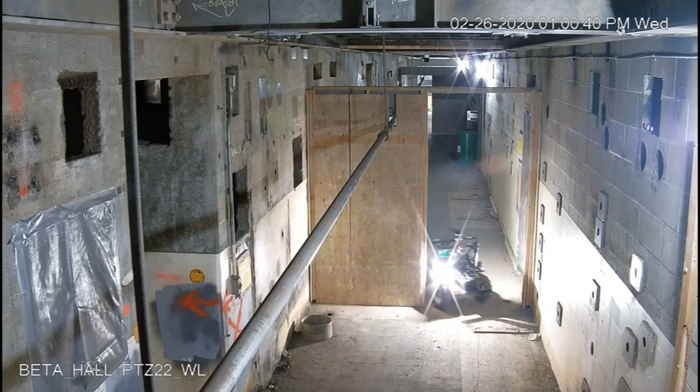In this work, we address the problem of enabling accurate and robust lidar odometry for autonomous robotic platforms involved in exploration of extreme environments, such as those found in mining, search and rescue, and planetary exploration missions.

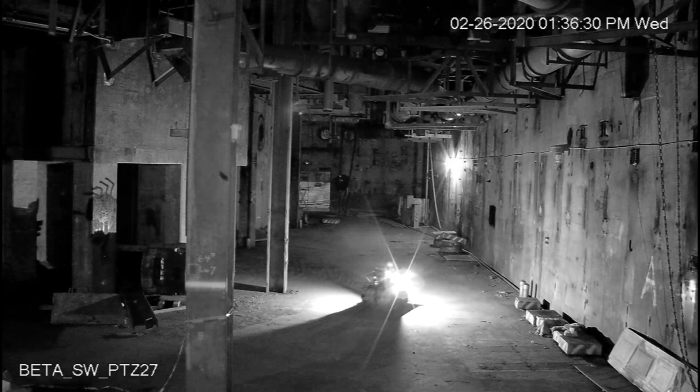In these scenarios, such as what you see here, onboard sensing faces severe perceptual degradation from conditions such as obscurance, self-similar areas, jerky sensor motion when moving over rough terrain, and even loss of individual sensor modalities.

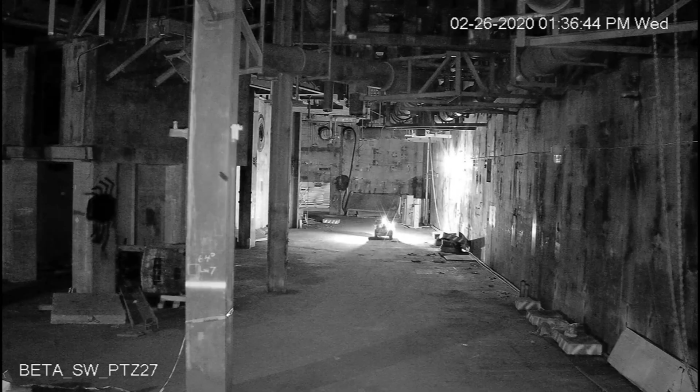This makes robust multi-sensor fusion a vital step towards achieving accurate operation in these perceptually degraded settings. While there have been many multi-sensor algorithms proposed that can achieve great accuracy, what we focus on here is the performance and the robustness under perceptual degradation.

To address these challenges, we present LOCUS, Lidar Odometry for Consistent Operations in Uncertain Settings. This is a multi-sensor, Lidar-Centric solution to real-time SLAM.

We will show here how it can achieve top-class localization accuracy in perceptually degraded settings and is robust to sensor failures.

LOCUS has been deployed on heterogeneous robotic systems in the DARPA Subterranean Challenge, where it was able to be part of Team CoStar's solution that won the urban circuit.

The proposed system can take a generic number of LiDARs and puts these through motion distortion correction steps. These are then fed into a point cloud merger to have one point cloud, which is then filtered to remove outliers and reduce the size of the LiDAR data to manage computational load. This then goes into our scan matching unit to do the LiDAR alignment.

However, one of the key components of this is our injection of external sensor modalities, such as visual odometry, wheel odometry, kinematic odometry, and IMU. These go through our sensor integration module that produces a robust seed to our ICP method of scan alignment.

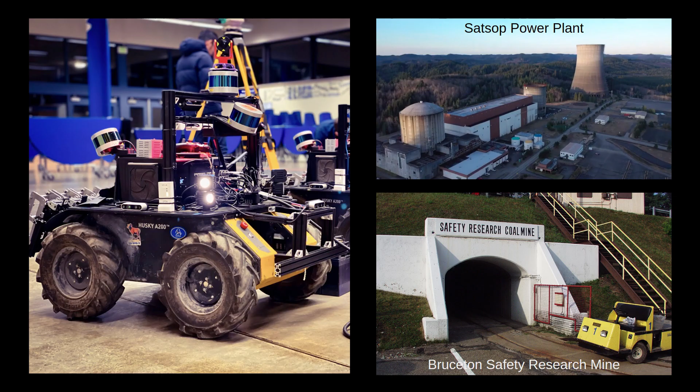We evaluate these on a dataset from a ClearPath Husky using 2 LiDARs and an IMU, as well as wheel odometry. There are 3 datasets, 2 in an urban environment in the Satsop power plant, and 1 in a mine in the Bruceton Safety Research Mine.

These are from the DARPA Challenge. They contain some perceptually degraded conditions such as self-similar environments, obscurance, and very rough terrain that leads to jerky sensor motion, especially with this skid-steer wheeled robot.

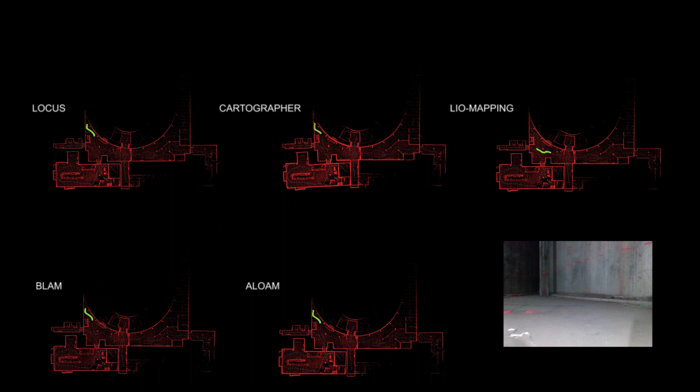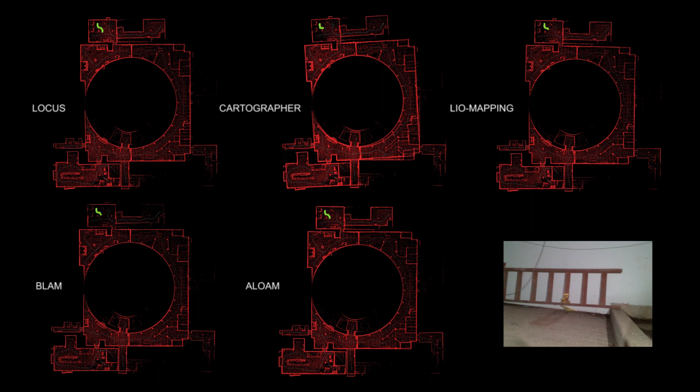Cartographer starts to drift slightly, but overall, most algorithms are performing well. LOCUS has the best map error at 0.29 meters and the best odometry error at 0.62 meters.

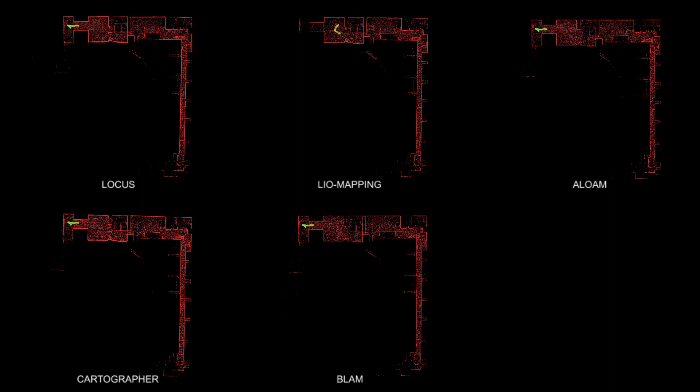Next, we look at the beta course. This is in the urban environment as well, and we introduce LIO mapping in this comparison, which you see in the middle, on the top. LIO mapping, while performing accurately, has a large delay with large computation times, so it's not able to operate in real time.

However, all algorithms perform quite well on this dataset. LOCUS still has the best map error at 0.69 meters and the best odometry error at 0.88 meters.

Finally, we look at the safety research course. This is in a mine, and a larger scale than the other tests, and we use LIO-SAM here, which you see in the bottom in the middle. All algorithms perform well at the start.

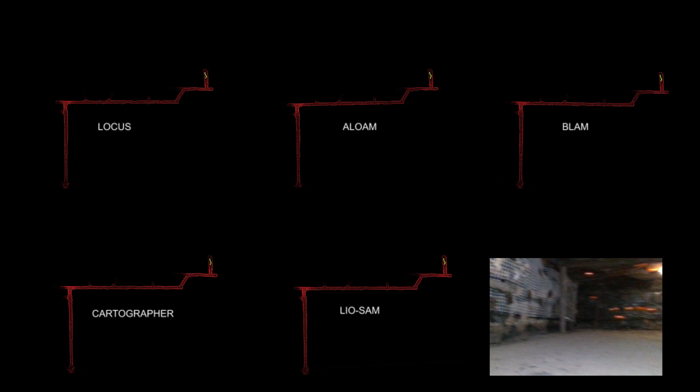However, the robot returns to some self-similar areas and goes back and forth in that area, with some large rotations as well. This causes issues for ALOAM and cartographer.

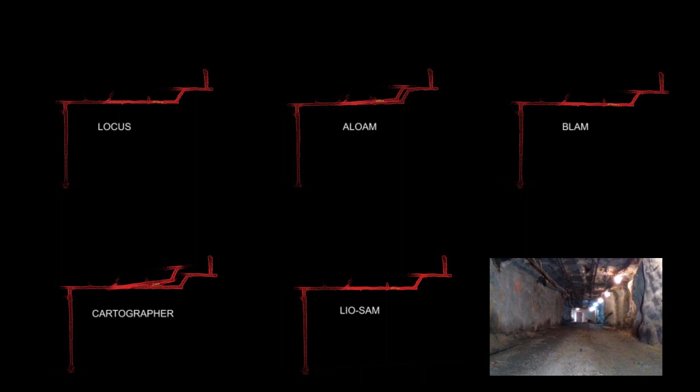As the robots continue to the furthest extent of exploration, BLAM in the top right has some issues with the rotational error.

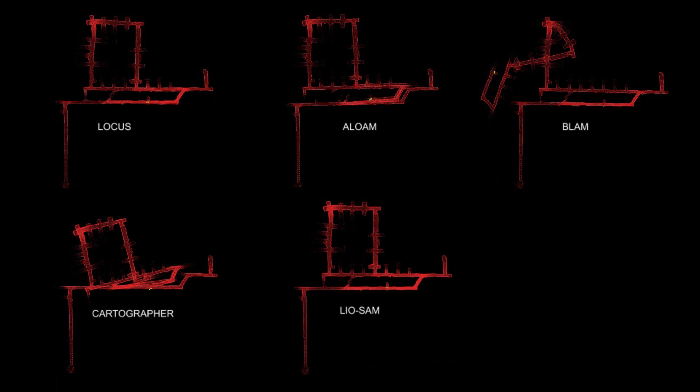However, LOCUS and LIO-SAM still perform well and are very consistent. In this course, LIO-SAM is the best performing, but with equivalent performance from LOCUS. The map error for LIO-SAM is 0.52 meters, whereas for LOCUS it's 0.63. And the odometry error for LIO-SAM is 1.26 meters compared to LOCUS at 1.67 meters.

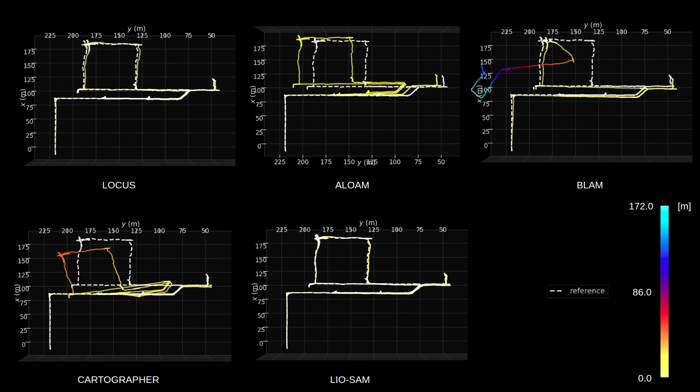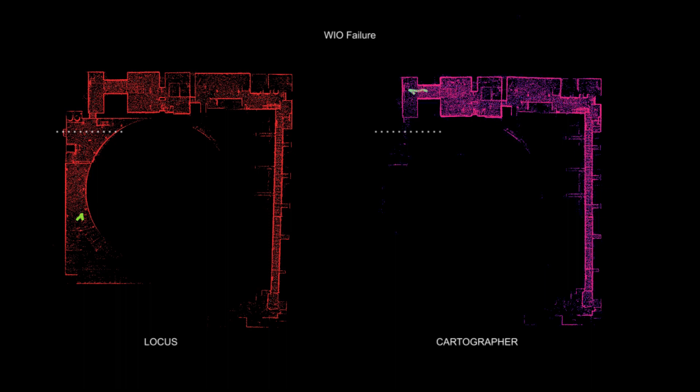Next, we look at the robustness evaluation, where we simulate drops in different sensor modalities. First, we look at a drop in wheel inertial odometry, which affects LOCUS and cartographer. LOCUS will simply step down to using only IMU as an initial guess and continue unharmed. Cartographer has a synced callback though, and hence stops operating entirely when one of the inputs to that synced callback is no longer coming through.

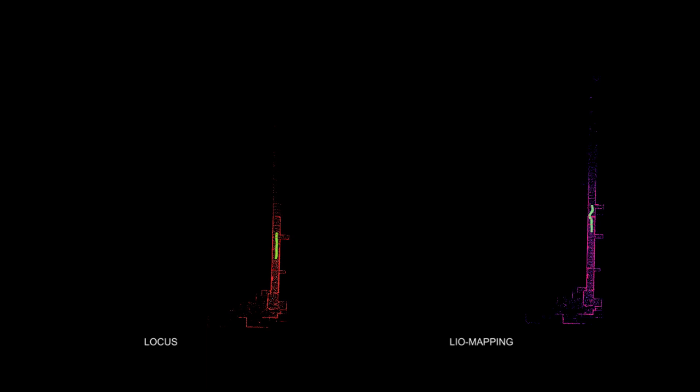Next, we look at the drop of both wheel inertial odometry and IMU. Here, we look at LIO mapping, a tightly integrated method. And this result is the same, where LOCUS can gracefully come back to a purely Lidar odometry, whereas LIO mapping has a synced callback and stops operating entirely.

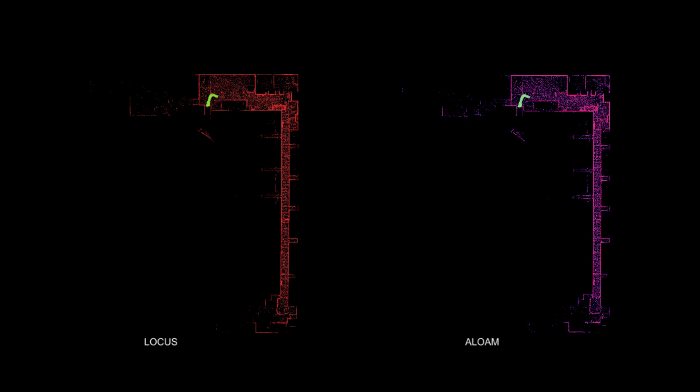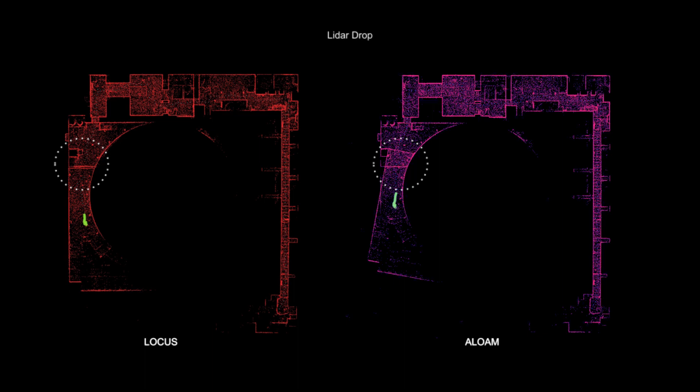Finally, we look at the drop of the most fundamental sensor source, the Lidar. We simulate a 10-second drop in the Lidar and see how that impacts the algorithm performance. What we see is that LOCUS is able to accumulate wheel inertial odometry over that period, and so when the Lidar returns, it is near to its correct position, and so the point cloud alignment from there forward is accurate.

Other algorithms are not able to do that. They either rely on IMU integration or no information. So when the Lidar returns, there is a large error in that resulting point cloud alignment.